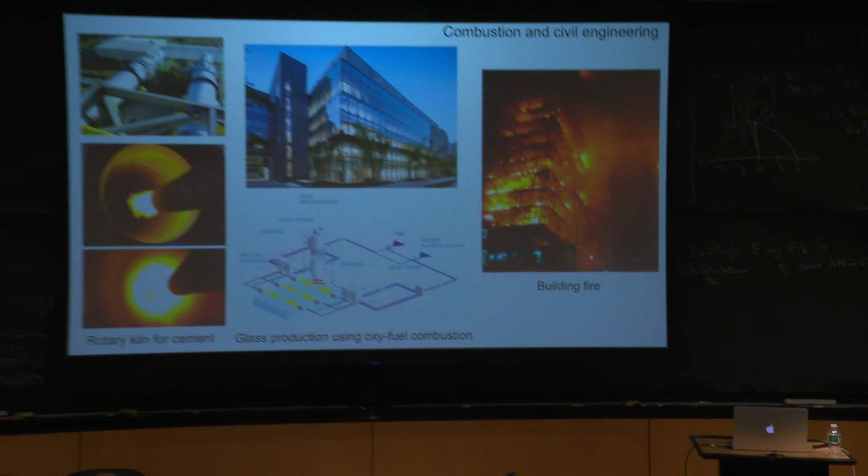One application of combustion is making cement. Cement is based on a combustion process, so without combustion it would be very difficult to produce cement. Basically, cement, which is everywhere, exists due to combustion. The second one is glass. Glass is a remarkable substance - it's unbelievable how beautiful it is and the properties it has. Again, that's a combustion process. You can produce it in various ways; in this case it's oxy-fuel combustion, but there are different methods.

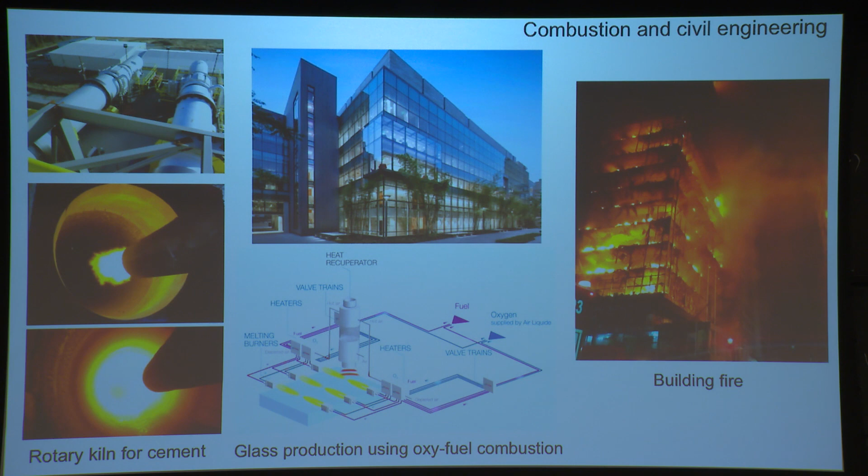The third application of combustion in your field of civil engineering is fire. You don't want fire in your buildings, so you should build things which do not catch fire easily, structures which are capable of sustaining fire exposure, and which are fireproof or delay fires. Fire is very important, and again it's a combustion process - of course, a negative one. So once I've said all that, you see that combustion is very important for you.

But of course, I'm working in a different area. My area of research is more oriented towards aerospace, aeronautical propulsion, and space propulsion. But what we learn in one field is very useful in another. The basic principles are the same for all applications; it's the way we use combustion that is different.

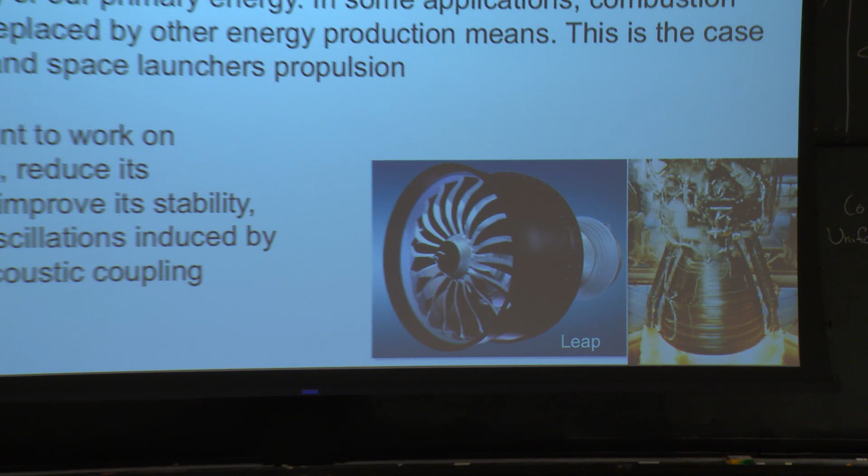The other thing to know is that 85% of the primary energy comes from combustion. At this point in time, most of our energy in the world uses a combustion process. In some applications, it is very difficult to replace combustion. For example, to fly an airplane, it's terribly difficult to do it otherwise.

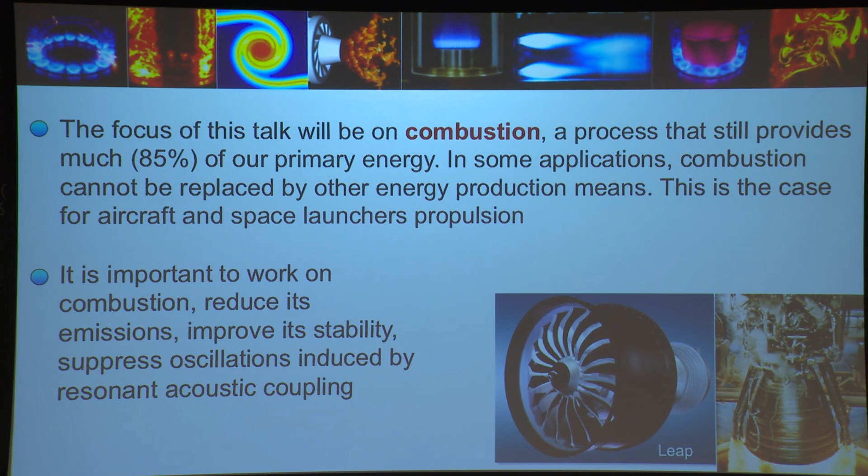It's even more difficult to fly a rocket with something else than combustion. So combustion is very important if you want to have GPS, satellites for communication, or observation of the Earth. You need rockets, and there is no other means of flying a rocket but combustion.

So what I'm going to tell you is a little bit of historical perspective in aeronautics and combustion, the key issues, very rapidly, and then give you some examples of our recent work that is essentially in the field of combustion dynamics, when the combustion process is in a dynamical stage.

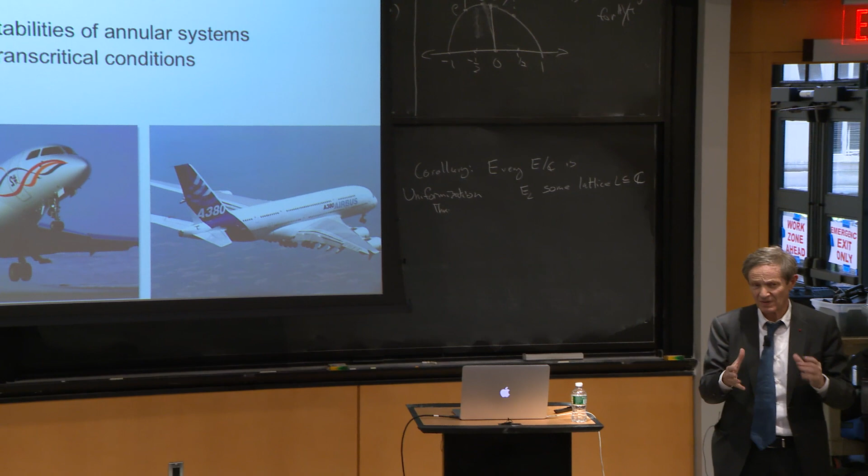The other area which is very difficult is to look at processes which take place in rockets, where you have cryogenic fluids at very low temperature and very high pressure. This is a special condition, of very great interest, very difficult to study, and we've made many advances in this field recently. So this is basically what I'm going to tell you.

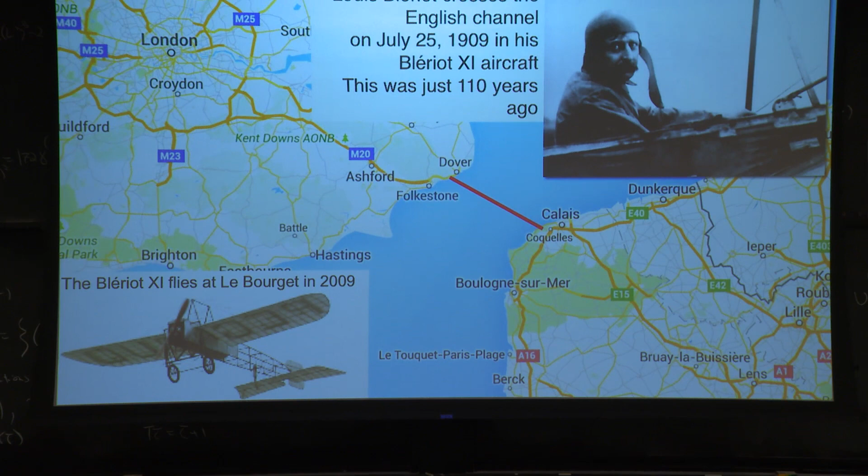In terms of aviation, aviation is very new, a little more than 100 years old, that's all. So you can see how much progress has been accomplished. Of course, our hero here is Blériot, an engineer from École Centrale, the school where I was trained and where I have been teaching.

Blériot, in 1909, on the 25th of July, crossed the English Channel, just 6 years after the Wright brothers' initial flight. He was the first, and he got the Daily Mail prize, which was a very big event. This is the Blériot 11 flying again at Le Bourget 100 years later. You see that plane, and this is the progress that has been accomplished.

His engine—why was he able to cross the Channel? Because he had the best engines of the time. The engines in France had double the performance of engines elsewhere, in terms of the amount of power per unit volume. These engines were twice as good as anybody's engines at that time. So the engine is really the important part of an airplane.

You see here the engines of the A380, very beautiful technology devices. What you see here is that Blériot's engine had 18 kilowatts, and now we are at 100 megawatts in these engines at full power. So you see the distance that has been accomplished. And of course, you can transport up to 600, 700 passengers in this airplane.

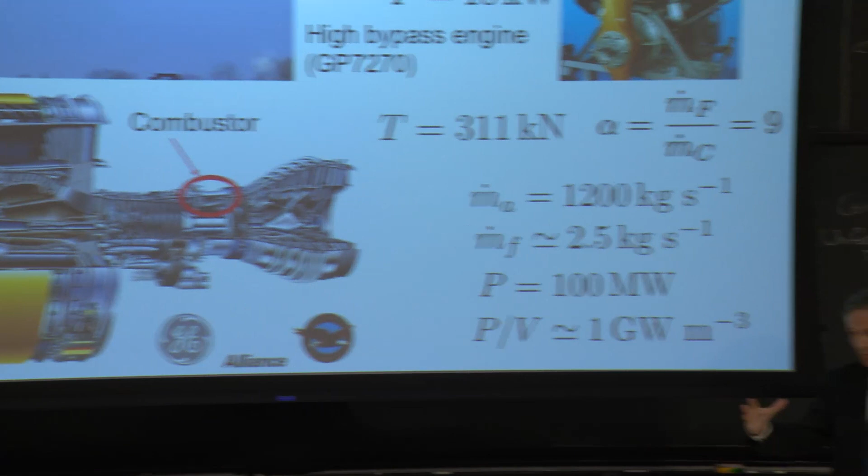Now, also something to notice is the power density: 1 gigawatt per cubic meter. So 1 cubic meter of combustion chamber is like a nuclear power plant. You don't have a full cubic meter, you have less than that, but it's already very, very strong, very, very dense.

There has been a lot of progress in these aircraft engines, especially in diminishing consumption. You want the lowest possible specific fuel consumption, the SFC, and you see that as years go by, we have been increasing the bypass ratio.

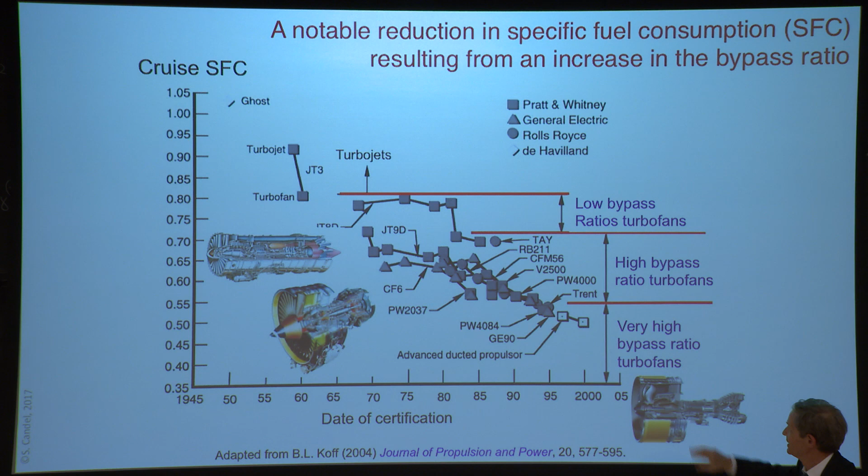The bypass ratio is the amount of air that goes through this secondary flow, through this secondary channel, divided by the amount of air that goes through the engine itself. And you see that we've gone to higher bypass ratios. This has been the trend.

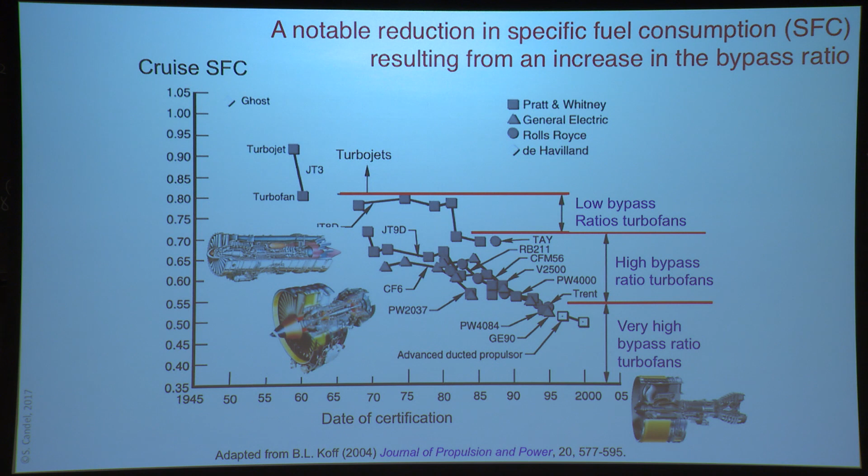As a consequence, you increase the propulsion efficiency, and this increases your global efficiency, and you get lower fuel consumption. In addition, the noise level is diminished. For once, you have both things at the same time: lower noise as well as lower consumption.

And this is reflected in the fleet. The fleet itself is much more efficient than it used to be. You see that as we change the airplanes, you change the efficiency per passenger kilometer. You take the passengers, multiply by the kilometers, and measure the energy that you need for that.

So E divided by RPK, revenue passenger kilometer, because you have also some passengers which do not give you any revenue. The pilot doesn't give you revenue. But the revenue passengers, the people who pay - you take that number, multiply by the kilometers, and you see the trend is being reduced. You brought that to a much lower level.

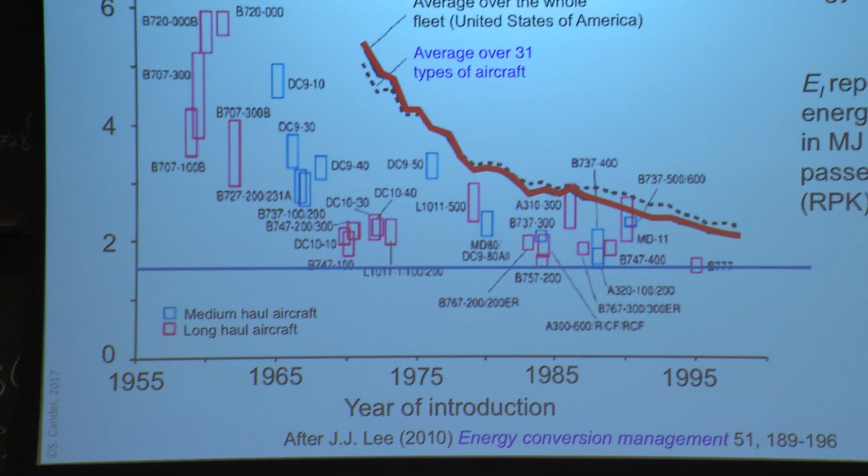And of course this is due to the fact that you improve the aerodynamics, you reduce the mass of the structure, and for civil engineers it's always important to reduce the mass of a structure. But of course we don't produce airplanes with concrete - you would not be able to fly a concrete airplane. So you have to build something which is really light.

And so you optimize that, and by optimizing the aerodynamics, the engine, and the structure, you can make such a very large gain.

And if you translate the number that you get, 1.5 megajoules per revenue passenger per kilometer, into, in our country, liters per 100 kilometers per passenger, you see you get 4 liters per passenger per 100 kilometers. So that's very good - it's better than a car.

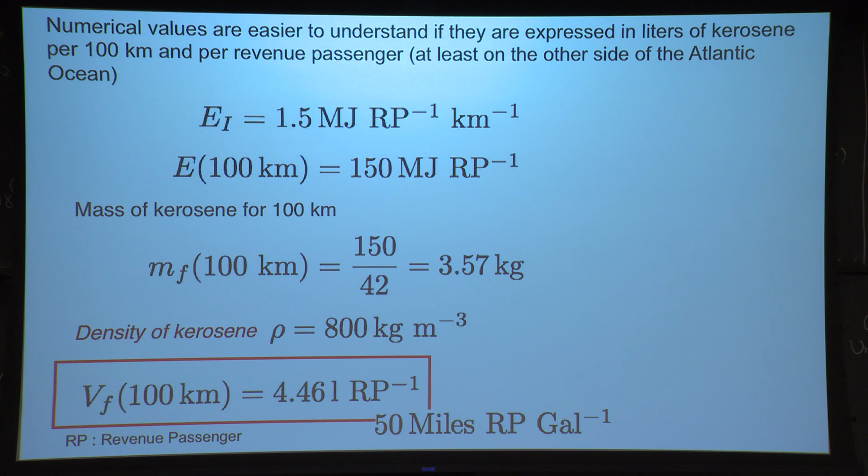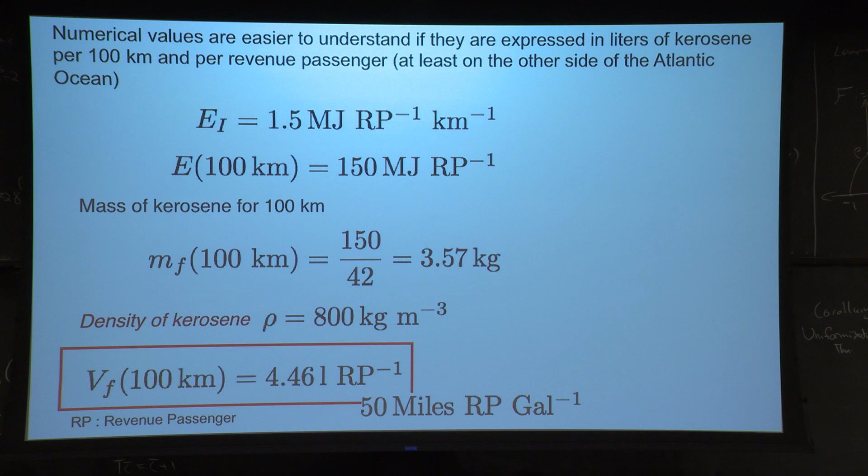This airplane flies at 900 kilometers per hour, and still the consumption is less than a standard car, especially an American car, which are not as efficient. So that's 50 miles per revenue passenger per gallon. Suppose you are in a car and you make 50 miles per gallon - can you do that? No. So the airplane does it. It's amazing, because technology has advanced so much - these engines have evolved so much.

Now let me go to combustion. Combustion is something that has actually helped civilization - without combustion, would civilization have occurred? Probably not. But man was able to master fire about 500,000 years ago.

It took a lot of time to understand how to control combustion and especially do ignition. Ignition only dates back - some people say 30,000 years ago, some people say 80,000 years ago. So ignition was controlled around that time.

But the understanding of combustion is based on chemistry, and you need to know chemistry. Chemistry was not there before Lavoisier. Lavoisier is the founder of modern chemistry - he was a member of the French Academy of Science, and he founded modern chemistry using combustion experiments. He was doing combustion experiments to understand chemistry, and he's one of the founders of chemistry.

It took a little more time to do the first theory of flames. It's based on the work of Mallard and Le Chatelier - this dates back to 1870. They were interested in explosions in mines, and they did the first theory of flames. The basic theory of flames is due to these people, and also Berthelot and Vieille, who were doing experiments.

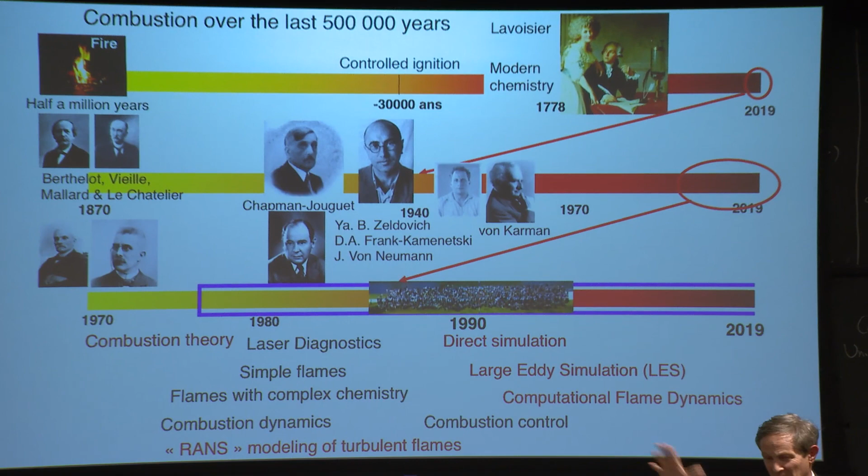This picnic took place in front of the Chambord Castle in France. A helicopter came in and took the picture. That's the only time the combustion symposium was filmed.

This gives you an idea of the number of scientists working in combustion. It's not very large. For example, in astrophysics you have 10,000 people working in that field, and in some other fields even more. In combustion it's a small community - this includes the ladies and the kids, everybody's there. It's a nice field because you don't have such competition, in a sense.

So what is the situation now? We have these four blocks. Theory is still very important, and we do theory. We are guided by theory. We always work on theory, but we won't see any equations here - I thought I would not impose an equation on you.

Simulations have gone very far now. We are doing parallel computing, high-performance simulation, and this has opened the horizon. It is now possible to get answers, calculations, solutions in just a few weeks, while with previous hardware it would take 100 years to get one solution. We will see that.

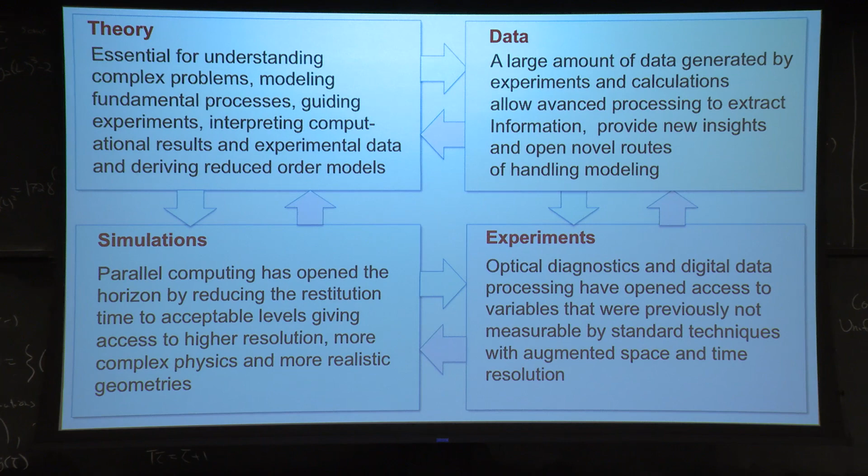Experiments have also advanced tremendously. When I started it wasn't like that at all. Now we have lasers, cameras, very high-speed cameras. We use optical diagnostics and can combine these diagnostics with the signals. We do data processing - it's been a long time since we've used very heavy, very massive data. It's not just from last year, it's many years ago that we started looking at data and learning from it.

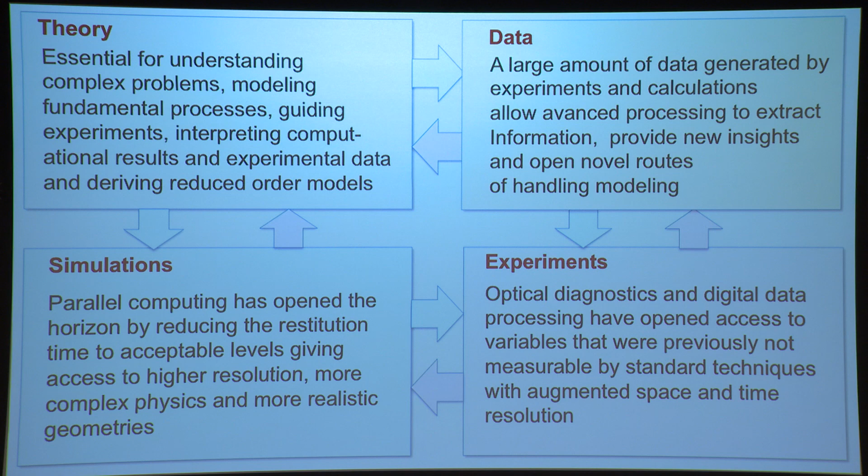And of course all of this is in conversation. So we try to do theory, experiments, data collection and processing, and simulations all at the same time, because the problem is difficult - it's difficult because it's a combination of many disciplines.

You have to learn not only fluid mechanics - that's our background, your background as well - but you also have to learn about chemical kinetics, and it's complicated kinetics. You have to learn thermodynamics because in many cases you have different phases. The situations are very high pressure, so you have real gas behavior. And transport plays a big role - multi-species transport and how the molecules finally get together and react. So these are at least some of the disciplines.

In addition, you need to know a little quantum mechanics because you're using lasers, because you're using spectroscopy - things that are not the standard mechanical engineer or civil engineer habit, but you need that. You need to know what happens when you do experiments, you have to learn that, and then computation as well. So when you're doing combustion, you're multidisciplinary. You don't need people to tell you that you should be multidisciplinary - you are. You need to know all of it.

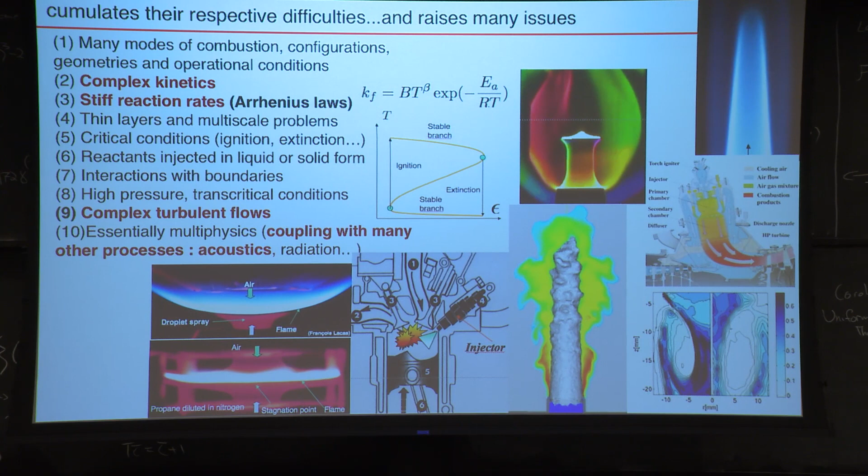Now you accumulate all the difficulties of all these fields. For example, you have complex kinetics governed by Arrhenius laws - you learn about these laws, they are exponential with temperature, and as a consequence the problems are stiff mathematically. You have a stiff problem. The flow is turbulent - in most applications the flow is turbulent. So again it's difficult. You have critical conditions: ignition, extinction. Sometimes the flames exist and sometimes they don't.

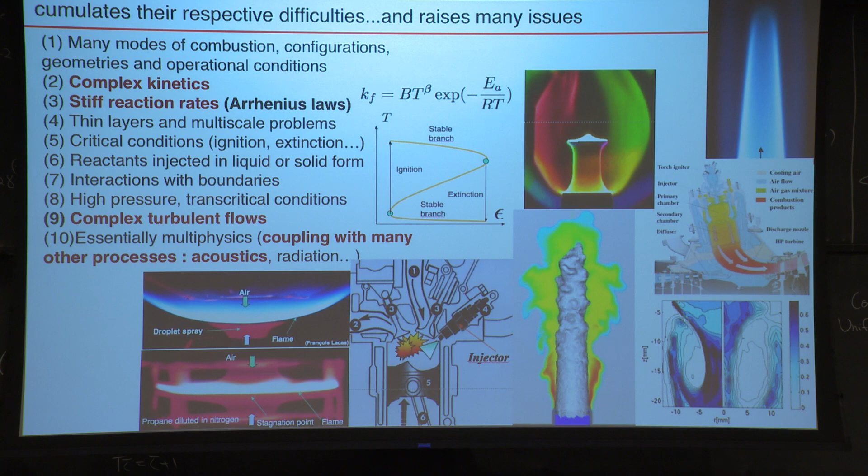Then you have coupling, for example with radiation. Heat is radiated, and this is what you sense when you have a fire close to you - you feel the heat coming in. In addition, you can couple with acoustics. That's a big problem, because if it's coupling, you can bring the system to a very high level of oscillation, and that may not be good for your system because of vibrations and reduction of life cycle.

So we have to cope with many problems here. Now, on the theoretical side, for example in 1954 - the pictures don't correspond to 1954, Von Karman is very young and Penner is old here - I just put two pictures to tell you that.

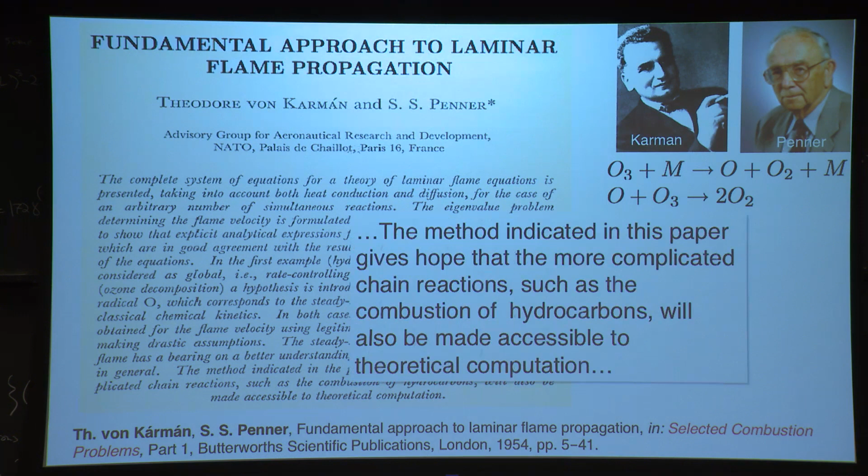These were just two reactions, but in fact this is not how we did it. We are now able to cope with such mechanisms. This is, for example, the mechanism for hydrogen: 38 reactions and 9 species. So if you want to calculate a hydrogen flame, you have to use these various reactions, all the pre-exponential factors and activation energies, and cope with that. In addition, the problem is mathematically difficult, but we know how to do that.

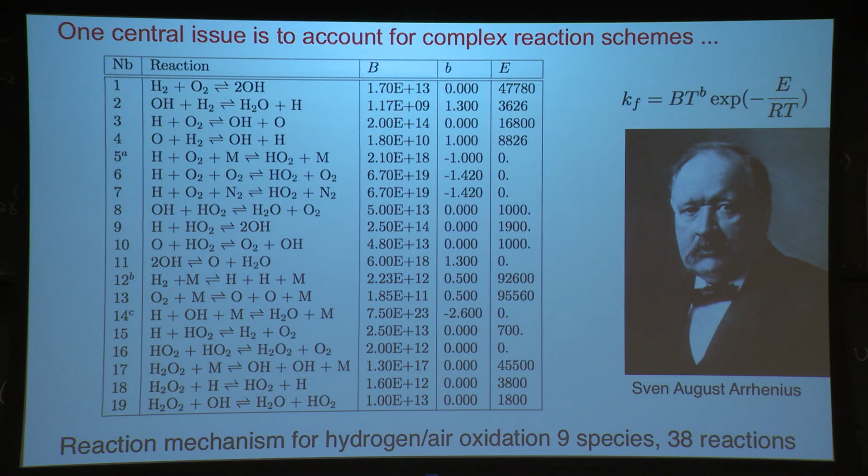Why? Because we use computers. We now use a computer to handle all these reactions. You are not coding by hand the source terms. You are using a processor which will code for you the reaction terms, provide the thermodynamics, and allow you to actually calculate such flames.

In addition, the flows are swirling—that's complicated again. And the fuel may be a spray, which you know about from a very different field. Then you have complicated boundary conditions as well. So you must be really bold to work on such problems. In combustion, we have to work on difficult, multidisciplinary, multi-physics problems.

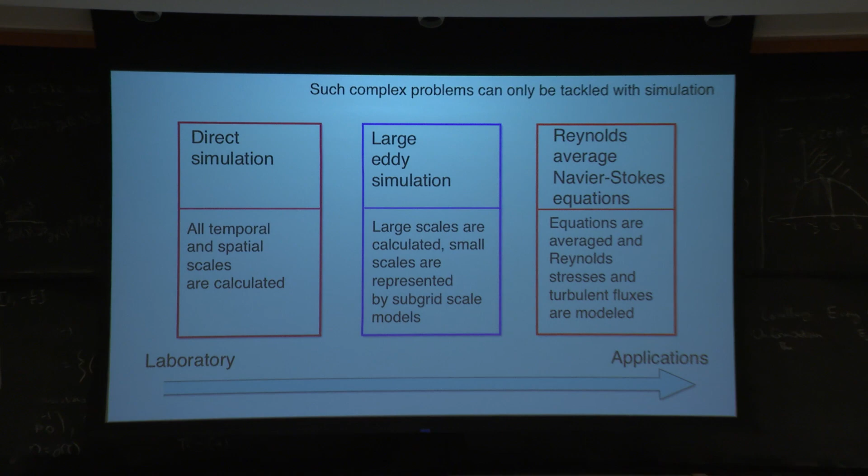And how do we do that? Of course, without the computer it would be more or less hopeless. You cannot represent such complexities by hand. You learn a lot from simple problems, but when it comes to calculating something, you need the computer. For many years, we were using the Reynolds average equations: you take the Navier-Stokes equations, average them, and calculate with this Reynolds average, but you need a lot of modeling, and that's difficult.

Then we started doing direct simulation. You take the equations, put in all the chemical terms, and do a calculation from scratch. This is possible—you take into account all the scales, small and big, all the time scales, everything. It's possible, but you can only work on very small problems, because the resources required grow like the Reynolds number to the 9/4. So it goes very fast as you increase the Reynolds number.

And in the middle, you have large eddy simulation. This is what is used, for example, to predict the weather, and the predictions are very good. Usually, at least in France, the weather is predicted with an extremely good capacity, and here I'm sure it is also. Yesterday I didn't believe it would rain today, but it was predicted and it rained.

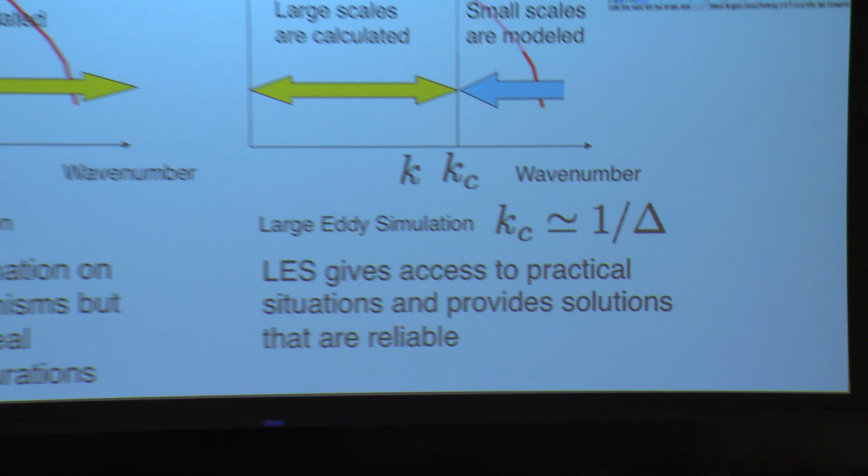So LES is great, and you can calculate. What you calculate in the LES is the large scales. In direct simulation, you try to calculate all the scales in the spectrum. In LES, the large scales are calculated and the small scales are modeled. This is the principle—a simple one. You think that at the small scales, it's more or less universal; at the large scale, it is not. So you calculate the large scales and simulate and model the small scales. This is called subgrid modeling.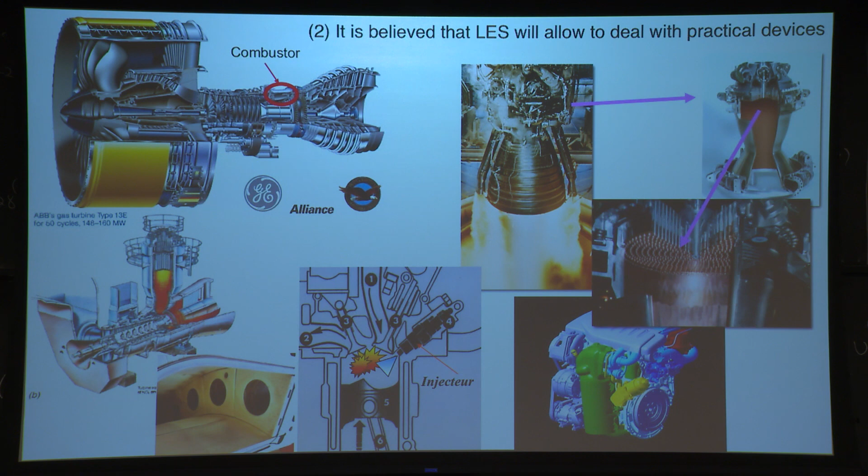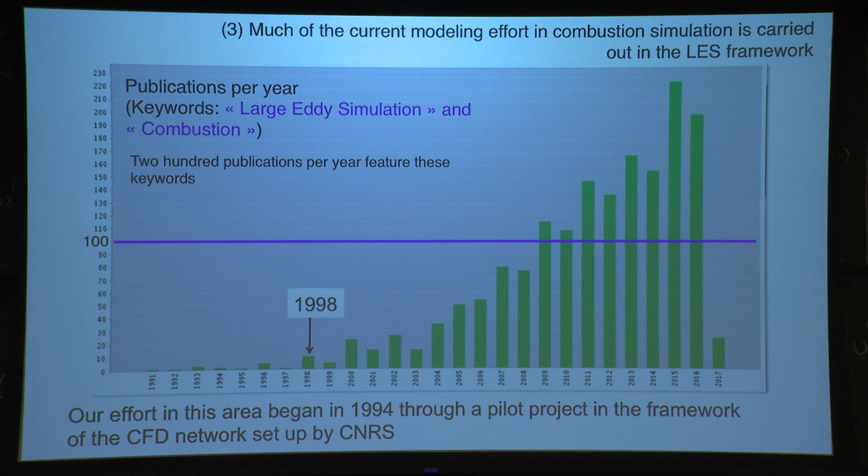So in all these devices, it is now possible to do LES. The thing started in the 1990s. It took a little while to do combustion LES; what was done before was just fluid mechanics, and combustion came into being a little later because it's more difficult.

So we started—our first paper on that is from '98. We began really to do nice LES. Of course, some LES had been done even before that, but basically this field has grown around that period. Now we have about 200 papers per year in combustion LES, much more in fluid mechanics. But it's a growing field.

The one difficulty in combustion is that the flame is very thin, typically of the order of a few tenths of a millimeter. And then you have a grid, and it's difficult to have grids which are extremely well resolved. So you have the problem of accommodating a flame on a coarse grid.

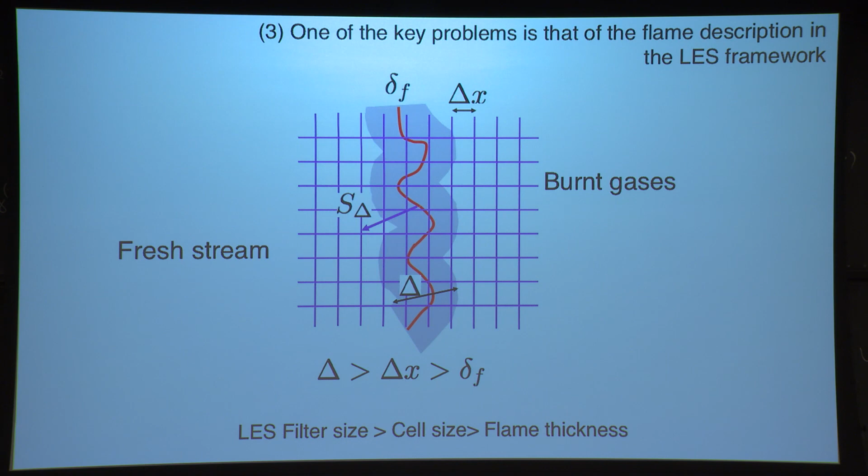It's a very fine grid in general, 10 million, 100 million cells, but nevertheless it's too coarse for the flame. So that's a big difficulty, and we worked on that. One of the first ways to do that is to thicken artificially the flame, so instead of having a flame which is very thin, you thicken that artificially while preserving the velocity.

This is some of the first examples of that. You can see that at the bottom you have the heat release, and at the top it's blue, which is fresh gases, and red is burned gases. You see that the flame is distorted by the flow. It's a turbulent flow, you can see pockets which are burning, and you see that it's already something useful. You can calculate something which looks realistic.

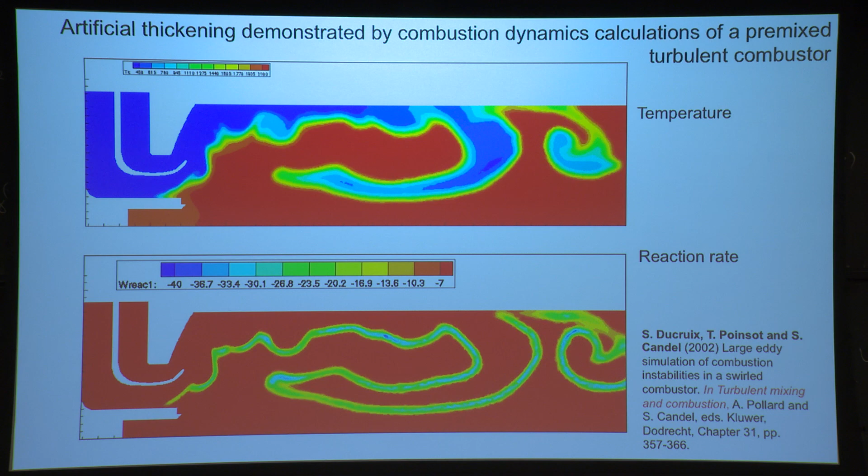It's a flame in a model combustor. That was around the year 2000. And now we are in much better shape.

For example, this is a swirling injector. The flow is swirling, and the flame is stabilized by recirculation inside this region here. You see that you can calculate such flames very nicely. You can actually compare some of the species that we measure, for example with fluorescence, with the calculations.

The agreement is reasonable. So now we get to points where you have a grid with 40 million cells. It takes about 200,000 CPU hours, but you get a restitution in a week because you distribute that over 2,000 processors.

How many hours are in a year? Who knows the exact number? 5,000? 9,000? 8,760. So you see, a year is not so long, unfortunately. And how would you get these hours if it was on a single processor? You would never be able to do that.

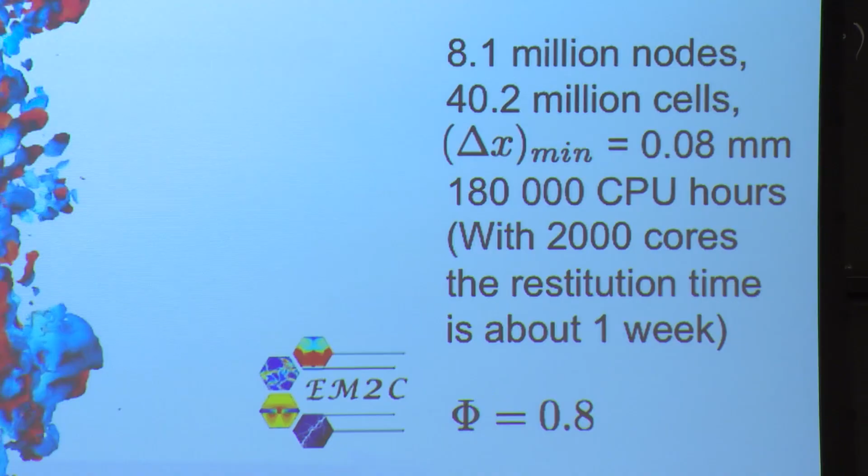So now, much of the work has been done in labs on simple flames, one single flame, isolated, and you do the measurements on such flames, like this one. This is a swirling flame in our lab. And more recently, we started doing things which look like aircraft engine combustors.

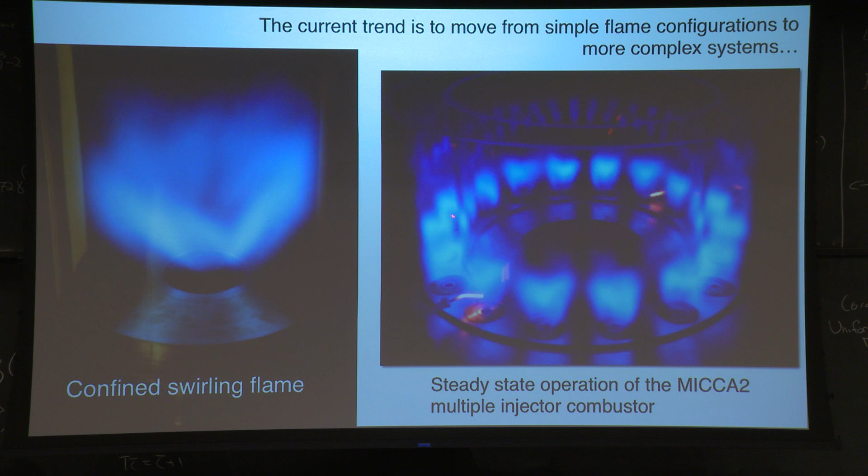What you see here is what we call MICCA, and this has 16 injectors. In this case, these were premixed propane and air, and all these flames are stabilized by swirl. The swirl is used in industry for flame stabilization. Of course you initiate with a spark plug, and once you have initiated that, the process is there.

At the beginning, this was engineered to study instabilities, how the flames interact with the modes, especially azimuthal modes. And we didn't get any instability. So we decided, let's look at ignition instead, and this is what we started doing.

Again, this is the aircraft engine, for example the CFM56 produced by Safran and General Electric, and you have the annular combustor sitting here. Of course you cannot do any experiments on this combustor. This is our laboratory scale combustor, and you see the walls are made of quartz.

We have 16 injectors, a plenum which feeds these injectors, and the geometry is annular. In this case, it's premixed propane and air, at atmospheric pressure. Of course, it operates at high pressure in reality, but at ignition it's at near atmospheric pressure.

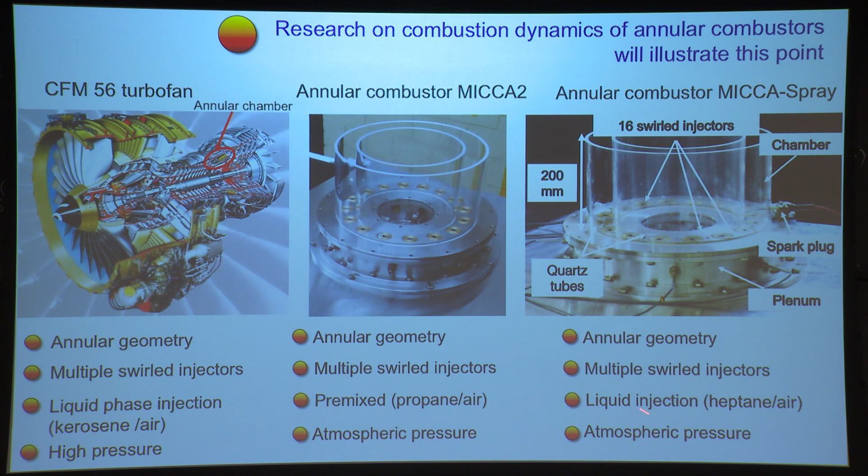More recently, this has been transformed into MICCA spray, where each injector injects a spray, so here we get closer to the aeronautical situation. It's still atmospheric, because as you go to higher pressure it becomes more expensive and more difficult, but you have to learn a lot at this point at atmospheric pressure.

So let me show you first an ignition. Here it is.

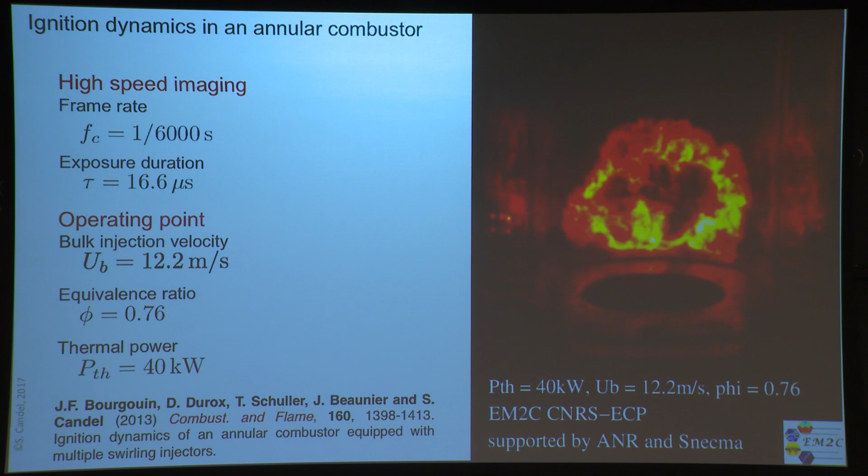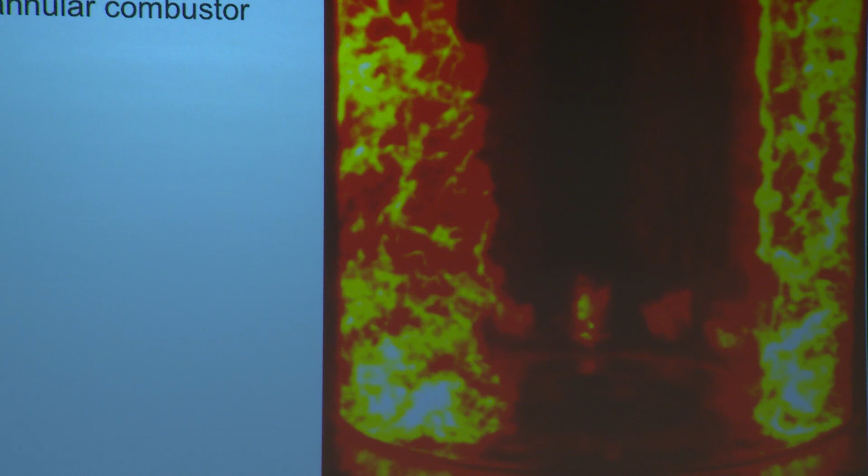So what you see here is in false colors. The whole process doesn't take much time, about 50 milliseconds, but of course it's at low speed now. You see that each of these injectors are ignited, and then the two flames are merging, and finally you have each of these injectors which are operating. So the problem here was to see if we could actually...

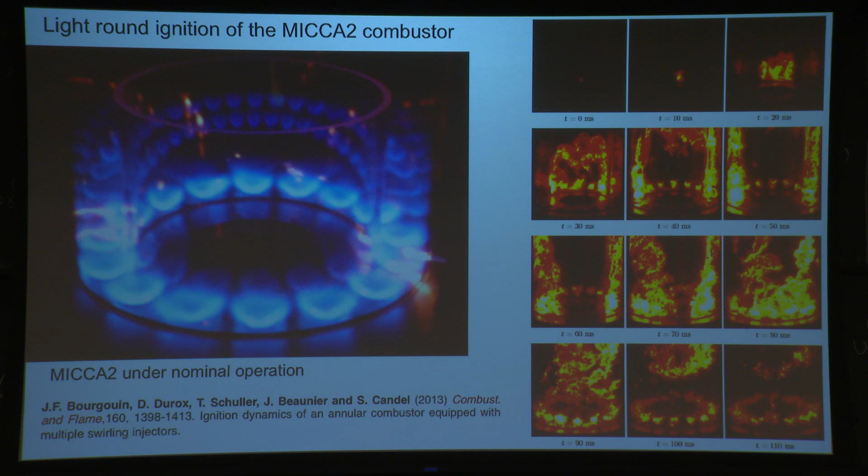represent that process numerically. So we started a new student working on a PhD just to try to represent what is seen here numerically, and this is what comes out. On the left side is the experiment—light emission intensity, you can think of this as somewhat like the heat release. On the right we show the flame surface, like a constant temperature surface, plotted to make it more visible. You show on the surface the actual velocity, so you have something more complicated. The two things are not quite the same, but basically you can compare them.

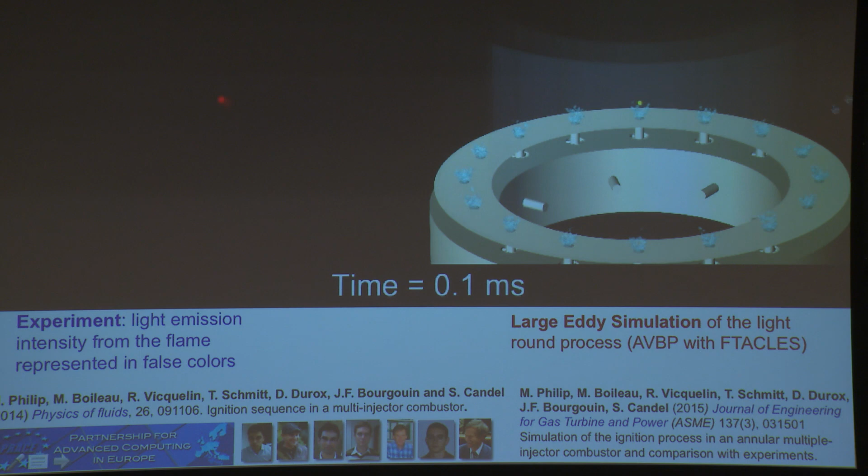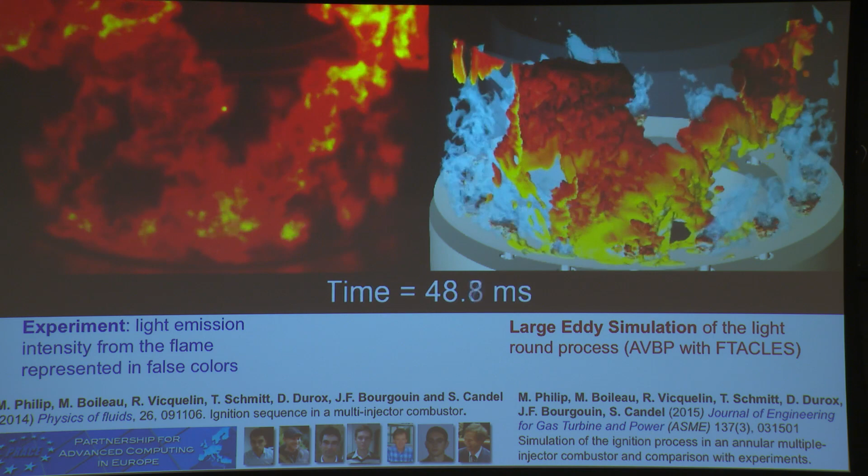The experiment is red because it's false colors—it's nothing, it's a blue flame. But you can see that the structures are very close, and the merging time is very good. Even the structure—this is turbulent, this is a really turbulent flow—nevertheless you have something which is very realistic, yes?

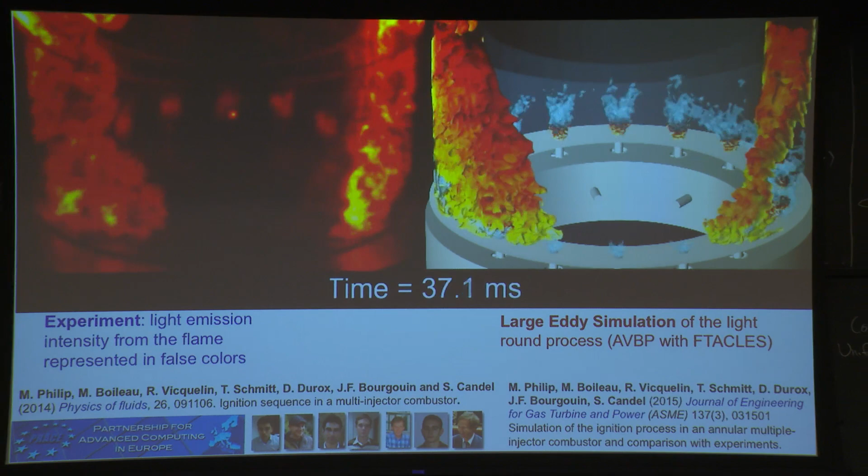You can see it again, yeah. So now such a calculation takes 1,000,000 hours of CPU time, so you cannot do such calculations all the time. You have a certain amount of computational resources.

And the first try was this one. So you get a good result without having to change anything, just using the right models, using a good LES code developed at CERFACS by the team of Thierry Poinsot. You see that it is definitely possible to retrieve this situation quite well. The thesis student was Maxime Philip, but we were a number of people to help him do that, doing experiments and calculations and discussing this.

So this was rather successful. In terms of the delay for the merging of the two flames, the LES is here, and this is the data. You have to match the boundary conditions of the calculations with the boundary conditions of the experiments. It's not so easy—in fact you should do a calculation which takes into account the heat transfer and so on. So what we did is preheat the walls and do the calculations using adiabatic walls. It's more or less the same, not quite, but it works.

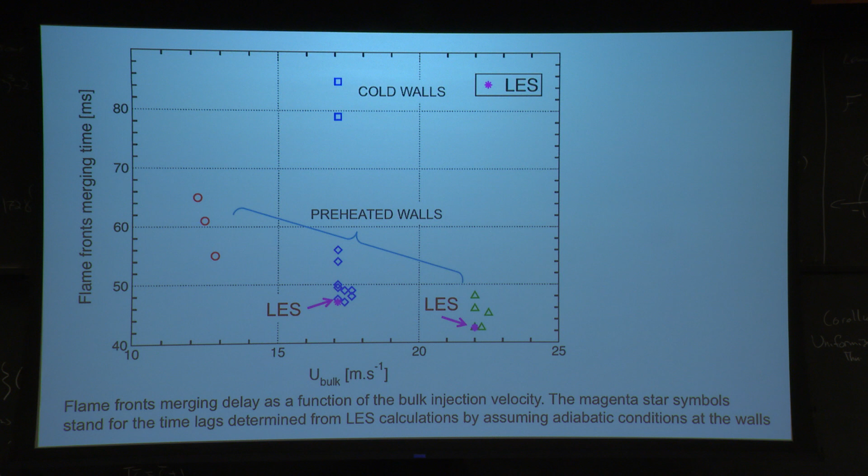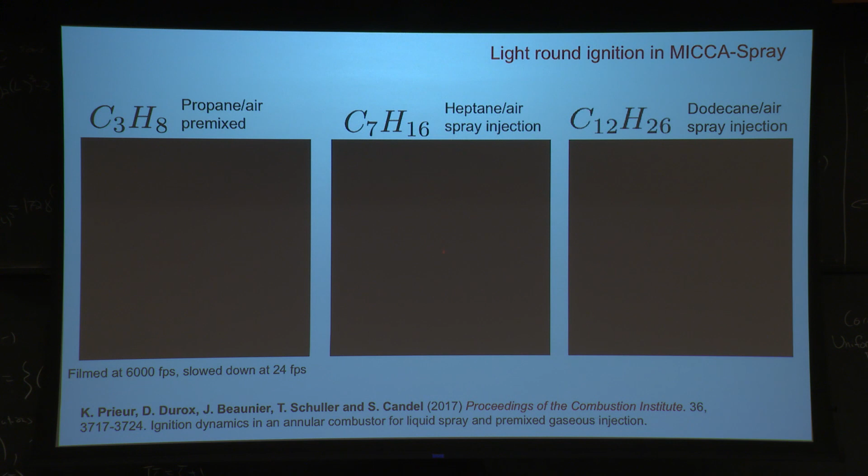Now what we've done more recently is to actually have that done with sprays. So we compare: on the left, premixed air and propane; in the middle, heptane and air; and dodecane and air on the right. What you expect is that the fastest will be on the left and the slowest will be this—and it's true, it works. You see that the premixed is faster, and this is slower, and that's slower.

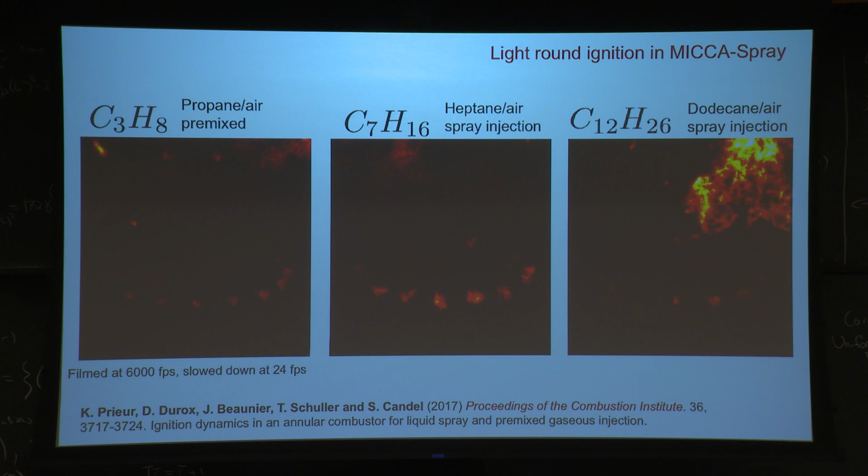Yeah, it's just the second time. So the idea then is, we've been able to do that in the premix case—what about the spray case? Is it possible to actually calculate that? Here we had another student working on that, Théa Lancien, a young lady, and she has done these calculations. And again, it's not too bad.

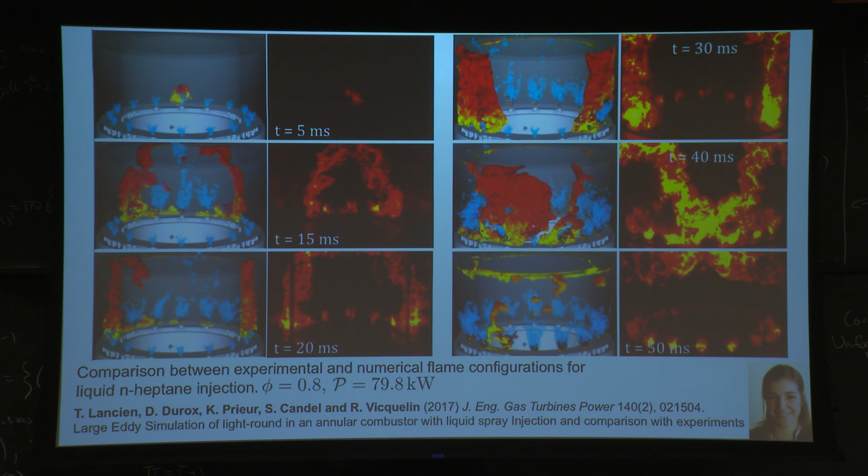This is a much more complicated process—the spray description is very difficult. So we use an Eulerian representation of the spray. But basically it works well again, and in terms of delay, this one is very good.

Let me now turn to this combustion instability, because all that was done to study instabilities coupled by azimuthal modes, and finally we got these instabilities. At first we were not able to, but we learned how to build injectors which could become unstable. So you have a learning process, and by doing that you know how to make something which doesn't go in the right direction—it's interesting. The first film is to show you one of these instabilities, so what you are going to see is the MICCA burner. So let's go back.

So we study these azimuthal instabilities. They are coupled by modes which are either rotating or fixed, but azimuthal. In this case, instead of the swirling injectors, we placed matrix burners to have a laminar-like combustion, so we eliminate the problem of turbulence.

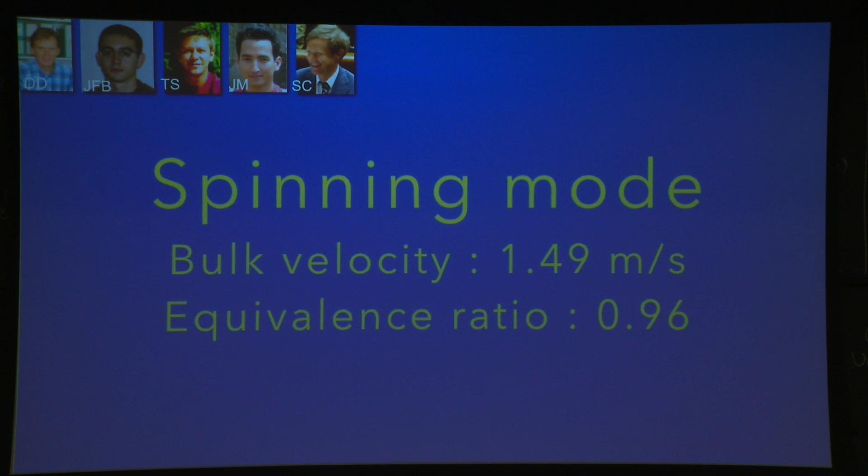So this is the instability that you hear. It's much stronger in the lab than here. And this is what you see at slow speed. You see that the flames are continuously rotating here. This goes more or less like the speed of sound. And then we have a standing mode.

In this case, what you have are flames on one side, and then on the other side, the heat release is increasing on one side, on the other side, and it moves like that. There is a nodal line in the middle. And then there is a special mode which looks like a stadium, you know, where people go up and down all together, and it's the slanted mode.

It's strange, do you have that here in some stadium, in football stadium? You see, it has a strange shape, in fact it's a mixing of two modes here. So we studied that experimentally.

And of course, you want to be a little more quantitative, and it is possible by using multiple microphones. You can watch the microphones with respect to themselves, and this is a standing mode. You can calculate a spin ratio and say yes, this is a mode which is fixed in space. And then you have on one side red and the other side blue, and then the thing is changing.

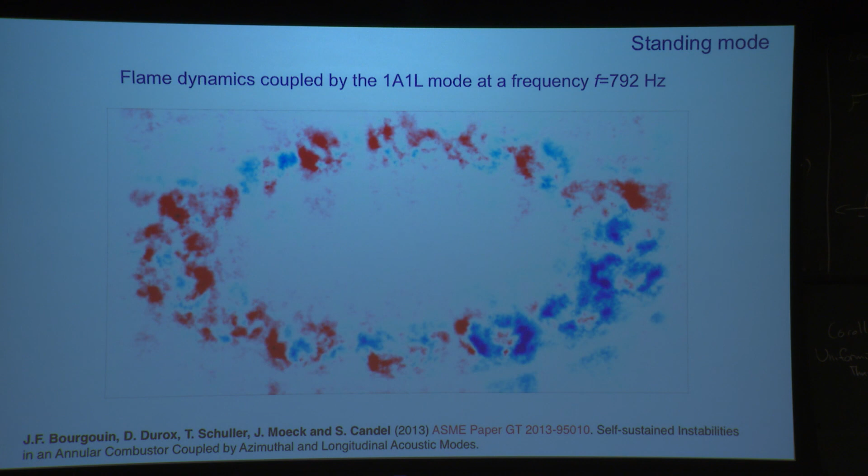And you can see it even in this case, where you have essentially a nodal line in the middle, in the diameter, and on this side it becomes blue, when on that side it's red, and vice versa. So now we have a system where we can study these azimuthal modes and the coupling between combustion and azimuthal modes.

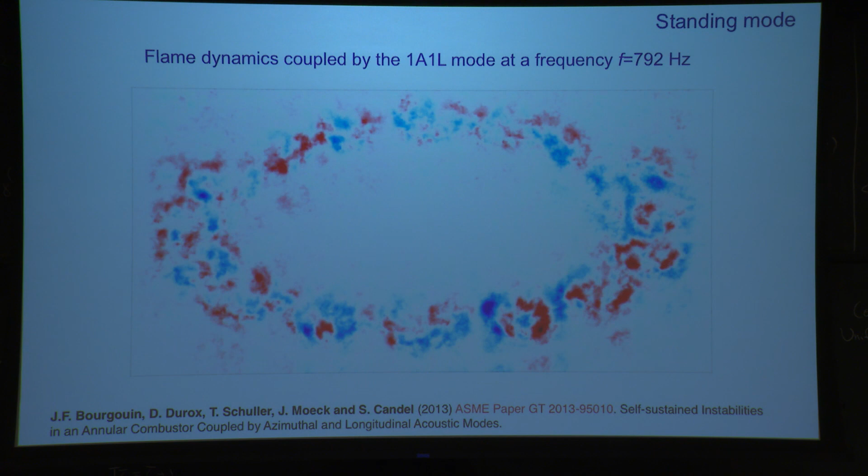Why is it important? Because the largest size is the perimeter, and so the frequency corresponding to that is the lowest, and it falls into the region where the flames are most susceptible to instabilities. And this is why we study these modes which are azimuthal.

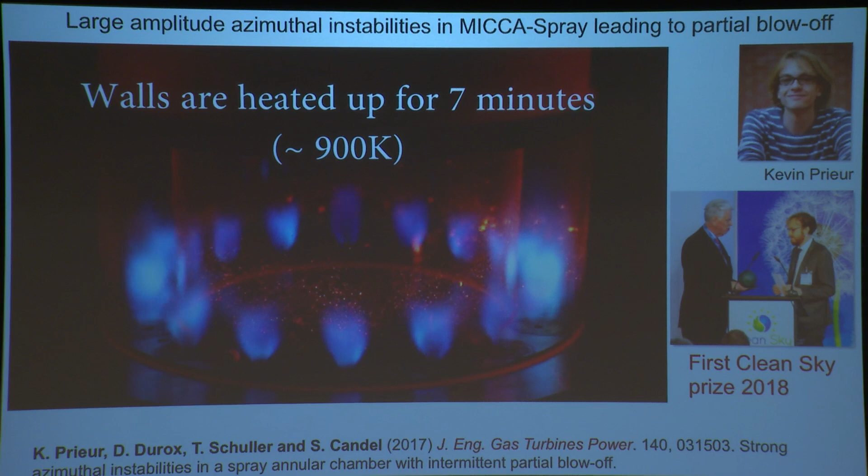All right, so let's move to another situation of interest. The instability will arise and will be so strong that some flames are actually extinguished. You see?

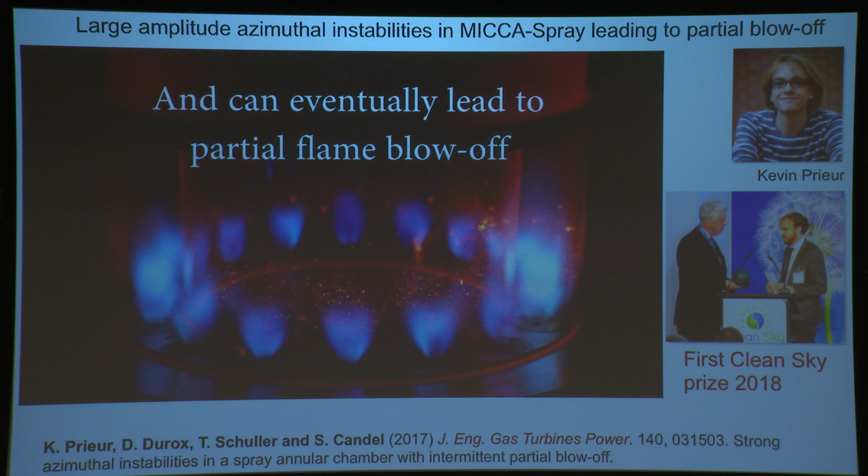So actually, our student here got one of the prizes in Europe, the Clean Sky Prize, for this work, and he's shown here, Kevin Prieur.

This is what happens when the amplitude of oscillation reaches about 5,000 pascals. The flames are extinguished in the middle by these very strong oscillations. It happens around the nodal line, the pressure nodal line, where the velocity, the transverse velocity, is highest, and you have this extinction. So it's a very interesting process. You have combustion, where the flames are blown off due to the combustion process.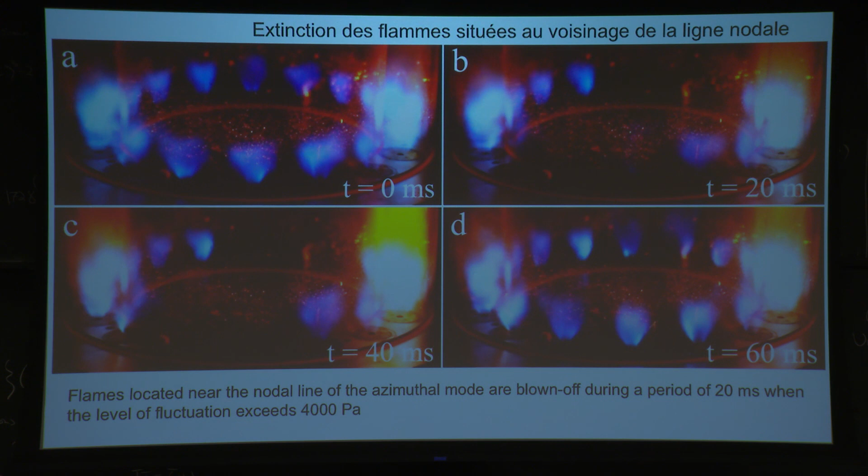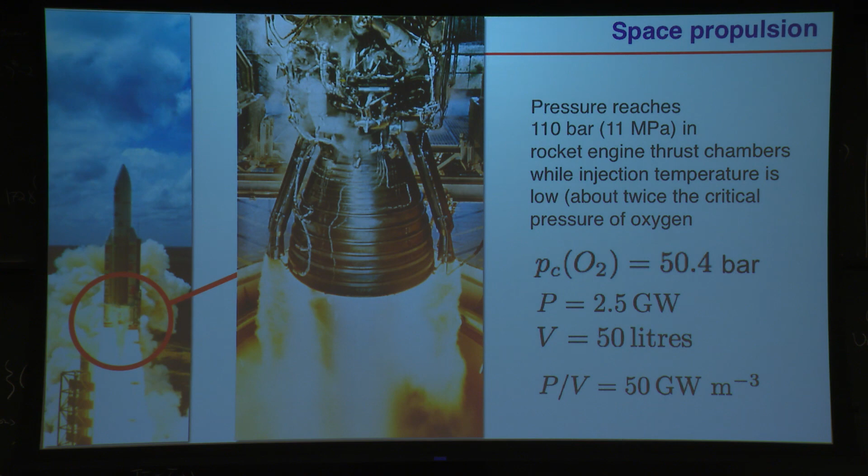All right, so let's now move a little bit to space propulsion, because you have similar problems here. They are even more difficult because everything works at very high pressure. In an engine like this one, this is the Vulcain engine of the Ariane rocket, the pressure is 110 bars. It's twice the critical pressure of oxygen. And you know, the critical pressure, if you are beyond that, there is no more interface between gas and liquid. This has disappeared. So there is no atomization, no fragmentation.

It's all different, and we wanted to know how that works. The power density is 50 gigawatts per cubic meter. So one rocket engine doesn't have a cubic meter, but if you have a cubic meter of such an engine, you produce like 50 power plants. It's very large, and this is a small engine, it's not even a big engine.

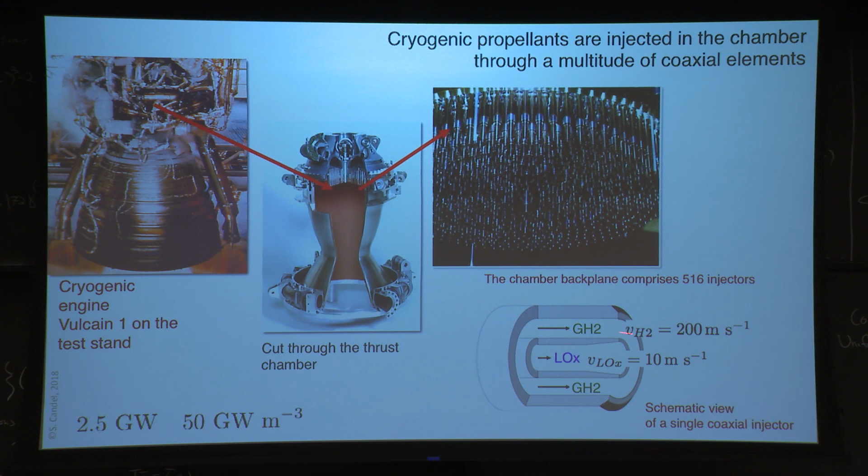So, and here, how does that look like? Well, you have many injectors, typically 500 injectors, which form the backplane of the engine. And what is interesting is that the hydrogen flows at 200 meters per second, very high speed. So how is the flame stabilized in a situation like that, where you have such a very high speed flow?

And that was an initial mystery. How is the flame stabilized in this case?

So it looks like that. But in fact, here you have coaxial injectors, hydrogen and liquid oxygen here. The liquid oxygen is injected at a few meters per second.

And what happens is that we are above the critical point. So we start from a situation where the temperature is low, but the pressure is high, and we move essentially at constant pressure. This is on the test bench. And this is in the Ariane rocket.

So basically here you have oxygen, which has the density of water. And then as it moves, as the temperature is increasing, its density diminishes, but you don't have any liquid-gas interface.

And this can be seen in these experiments. You see here, this is at low pressure. You have here nitrogen, liquid nitrogen surrounded by helium, and you see droplets being formed and the initial breakup and then atomization and finally vaporization.

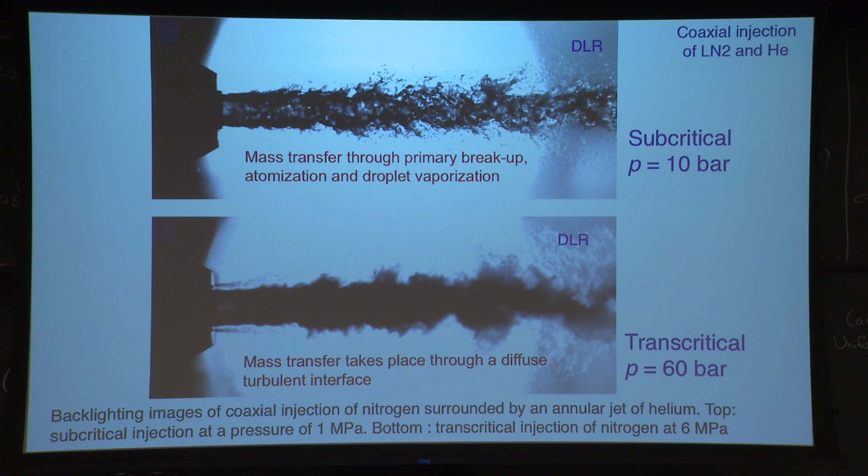So we wanted to actually calculate something like that. And of course, this took a lot of effort. We did experiments on small combustors with a single injector, and then we did calculations here using LES. So let me show you first the experiment.

This is ignition, and then the pressure increases, and now we are stabilized at about 56 bars. This is methane and oxygen. So this is how the flame looks like.

And the calculations are here, if I can run them.

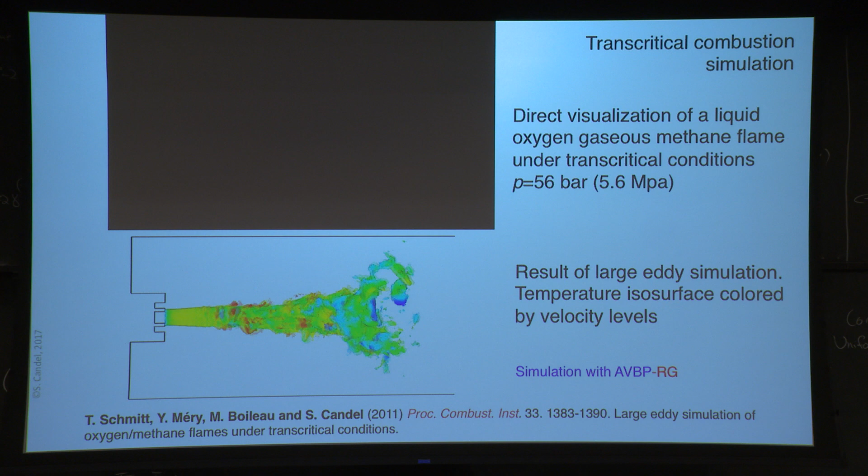And if you remember the flames, it looks very much the same. The length of the flame is well represented, so the heat release is properly represented. And now this is a calculation which is done under transcritical conditions, turbulent, high pressure, reactive, and it represents what we've seen experimentally. So we were very happy with that. That's a rather recent result.

And then we did more experiments. Of course, rockets have also these very, very problematic instabilities. And one way to study that was to make something which would look like a small engine with 5 injectors, not 500, just 5. And we would place 2 nozzles. Usually you have a single nozzle. Here we have 2 nozzles, and we block the nozzles alternatively.

So you have this device. I have a film here. We call that the very high amplitude modulator. And you see it blocks one nozzle and then the other. And like that, you have an acoustic source, and you can trigger the transverse acoustic mode.

And you can get levels inside the chamber of more than 210 decibels, which is a world record level of decibels. I don't think you can do it. So you get a very strong transverse oscillation.

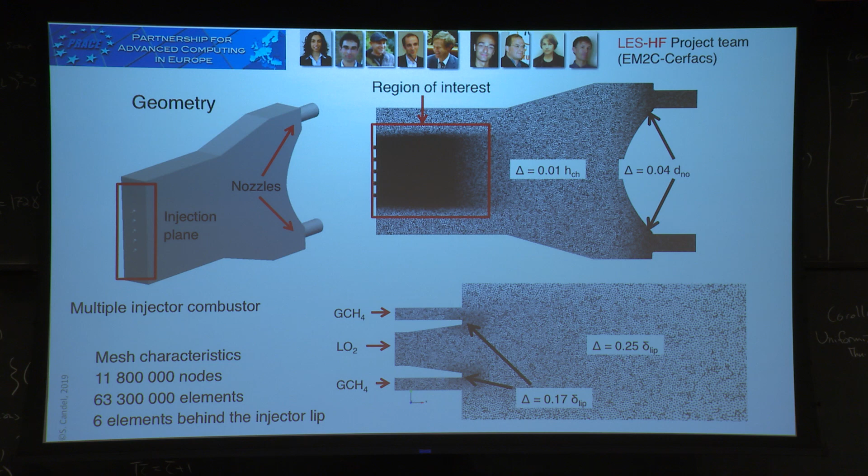Now, of course, you want always to do the calculations of what you are doing experimentally. This is a complicated situation because this is the chamber. You have the 2 nozzles. You have to represent this blocking of the nozzles alternatively. So you see the number of elements. It's about 60 million elements. And this is without any oscillation.

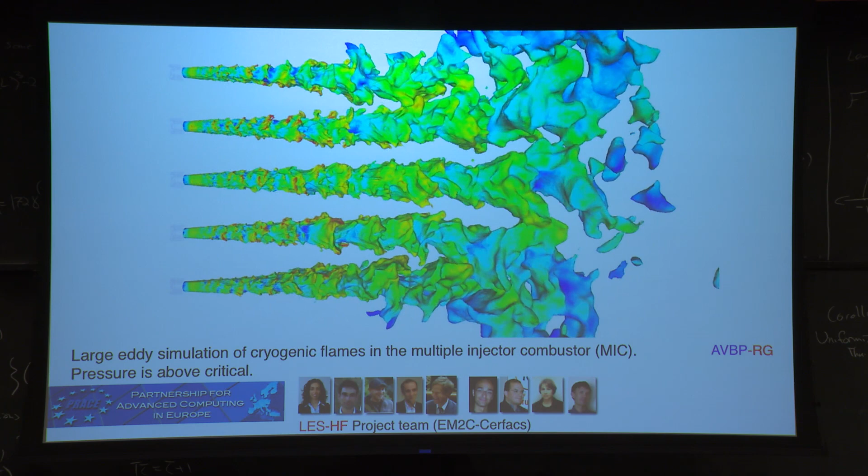So these are the jets. We have 5 jets here representing a larger number just to see how it works. And now this is what happens under excitation. The jets are initially on the left. You have jets which are under natural conditions, no oscillations.

And on the right, the oscillation is there. And the jets are much more compact. So the acoustics here, this coupling with acoustics, makes the jets much more compact.

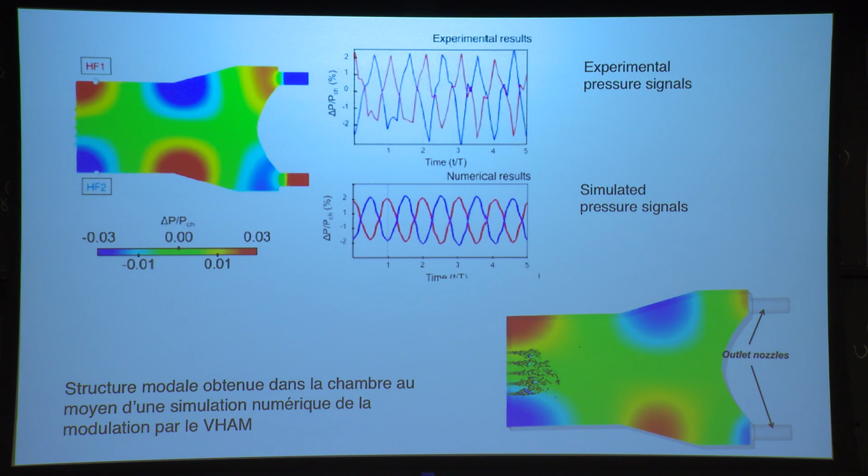Does the calculation do the same? Well, first of all, you have to check that you get the same modes in the experiments and in the calculation, and this is correct. And this is the calculation. So the jets are more compact.

So you represent this effect which has been seen in the experiment. Not with the asymmetry that was seen in the experiment, but the jets are indeed more compact, and they respond to this very strong acoustic motion, transverse acoustic motion.

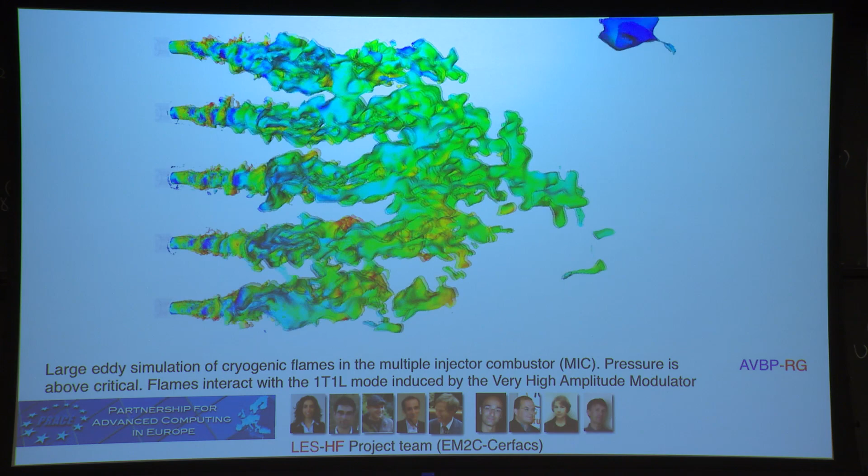And the more recent stuff is that we've been able actually to look at something which looks like a rocket engine with 42 injectors and which has features, instabilities. And you see a calculation of this situation that's a lot more difficult because you have this complex geometry, but it's all modeled in this calculation and here.

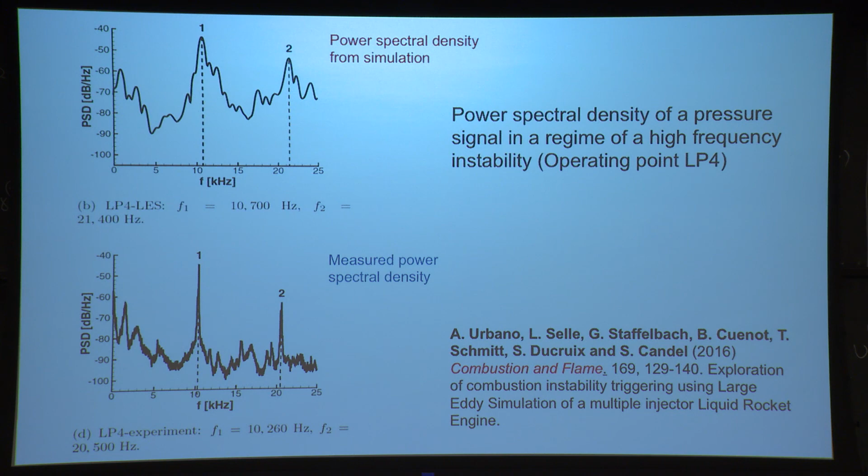And you get something which is, when you analyze the signals, and we've looked at the modes and so on, it's pretty reasonable. You see the spectra, the power spectral density from the simulation. The resolution cannot be as good as in the experiment. In the experiment, you have sufficient time to get the data and to do the averaging and so on. In the calculation, it costs too much.

So, but basically, you get the two modes. This instability is coupled by two modes and not a single mode, and it's pretty close to what you see experimentally. So that was a very difficult problem, you know, during the Saturn V development.

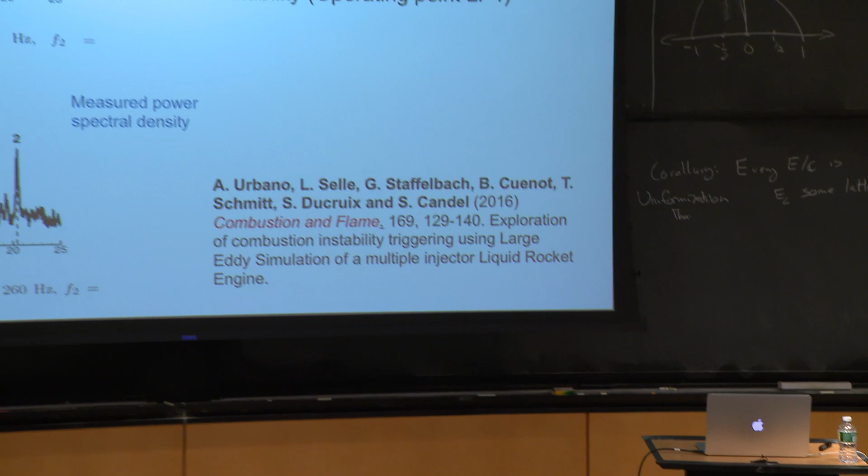Combustion instabilities, high frequency instabilities were a big problem. It took a lot of effort to solve them before the rocket could be launched. And now we are getting closer to predicting using LES. So there has been a lot of progress. We are now really closer to understanding and to actually representing these mechanisms.

So this is my last slide. I just wanted to tell you that we've made a lot of progress in combustion dynamics. And this came from experiments, from calculations, from theory. We have combined all that.

If you do just calculations, you're not capable of representing. You need to be guided by experiments. Without that guidance, it's very hard to. And of course, our asset is that we do experiments and we do the calculations as well. Many students in our group actually do the two things. I don't know how they do it, but they do both.

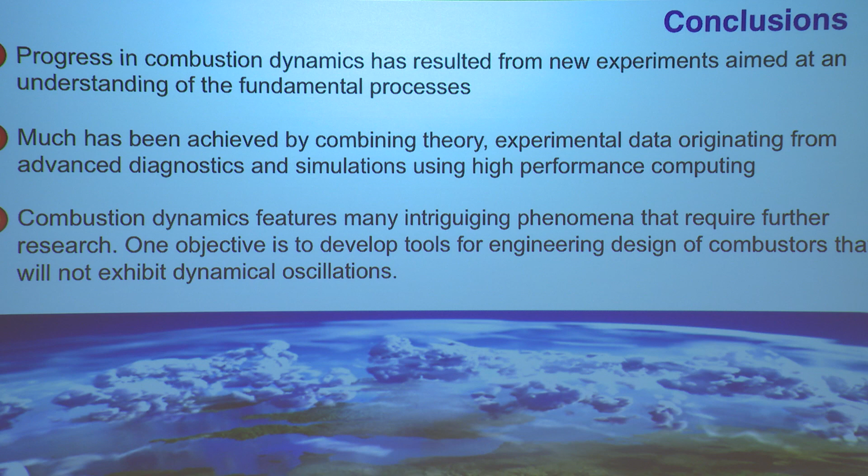And there are still many intriguing phenomena. It's not fully solved, so you have here the best part of it, but there are many problems yet to look at. The situation is fine, but there are many difficult problems. Like, for example, soot production in flames is a very difficult problem, and we are actually engaged in trying to solve that problem. There are many other aspects which are not fully understood, many features which need more work. So with that, that's my conclusion. Thank you for coming and for your attention. Thank you.

Very impressive array. It's a very impressive array of experiments and computations. And I guess this is a question about progress versus challenges. You've captured a number of different features with the computations that you couldn't have done 20 years ago, or maybe even 10 years ago. So are there more features to capture, or have you got most of the features and the rest is quantitative improvements? Where are you in this process?

Yes, some of the, yes. Is that a fair question? Yes, yes, very good. Yeah, yes. We are very happy with many of the features that we captured here.

For example, it's difficult to think that we could calculate these high pressure flows, because you have to actually use a real gas equation of flow, an equation of state, which is not very usual. You always use P equals rho RT, the perfect gas law. Here we use real gas, and we use real transport features, which are again a whole problem.